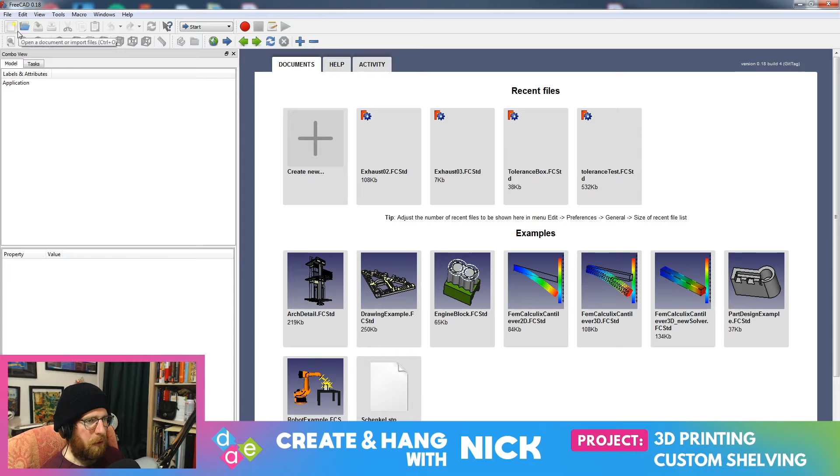Now, in this case, we're going to create a new document here, and already we've got the blue of the infinite. So we're going to go ahead and start by creating a body, and we're going to create a sketch. Now, what axis do I want to do this in? Yeah, we'll do this from top view, which is the XY. Great. All right.

Now, I figure what we're going to do first is, rather than actually model this, to get a better sense of the proportions and everything, I'm actually going to create the table first. So that way I can sort of fit things a little bit more. I think that would be a little bit easier for reference too. So let me pull this back over. So since this is a top-down view, we're just going to create the table. And all right, I have to convert this from inches to millimeters. My favorite thing.

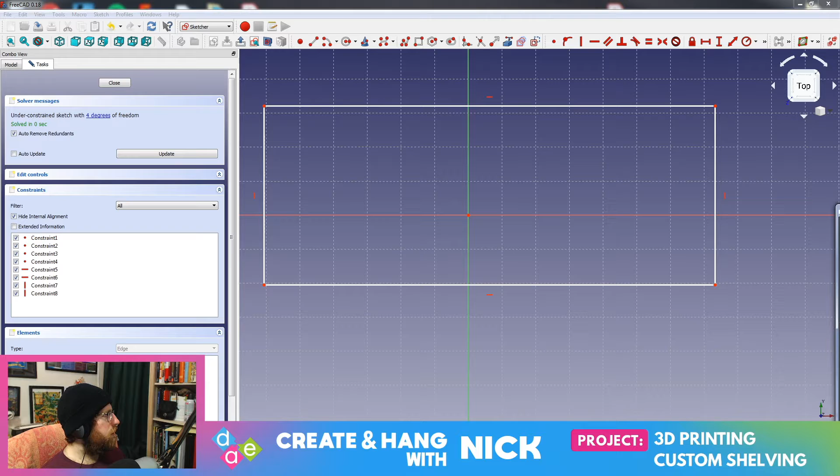All right, I got to bring this back over for a second. Sorry, I'm trying to avoid doing a lot of number crunching because I know that's not the best thing in the world to watch, but this is unavoidable in this case.

Numbers are important. I gotta say, one of the things I wish, and I realize this is tough to do, is have school projects in mathematics that were a little bit more visual and they gave you stuff to actually handle. I don't think I started to appreciate mathematics until fairly recently, actually, when I actually started needing formulas and things to figure stuff out. I don't know, it's just a thought. I realize it's very hard to do, and you got to learn some specific things first before you do other things. It's tough.

But let me see here. So I need 23, and number crunching. Actually, if I remember correctly, 0.65. Nope.

23.625 and another smidge. So another 5. All right, so that is 601.6117 millimeters. So that's the long side here. So 601.6117. All right, cool. So we got that length defined. Now we got to do this one, which we'll do that way. And we'll do that one.

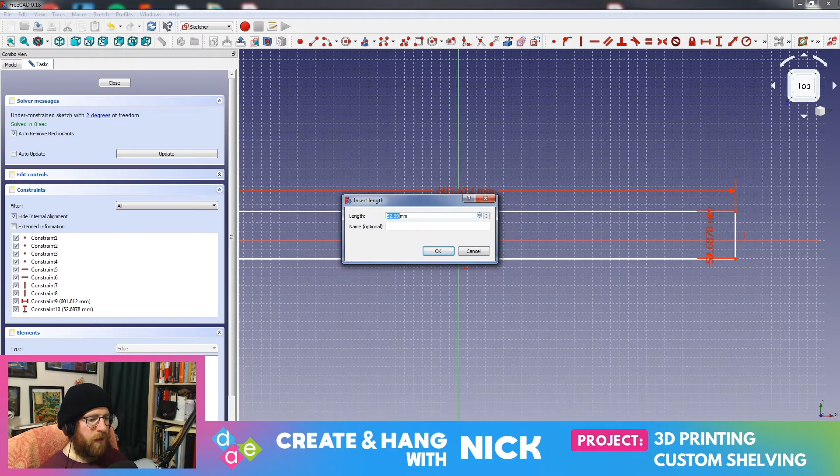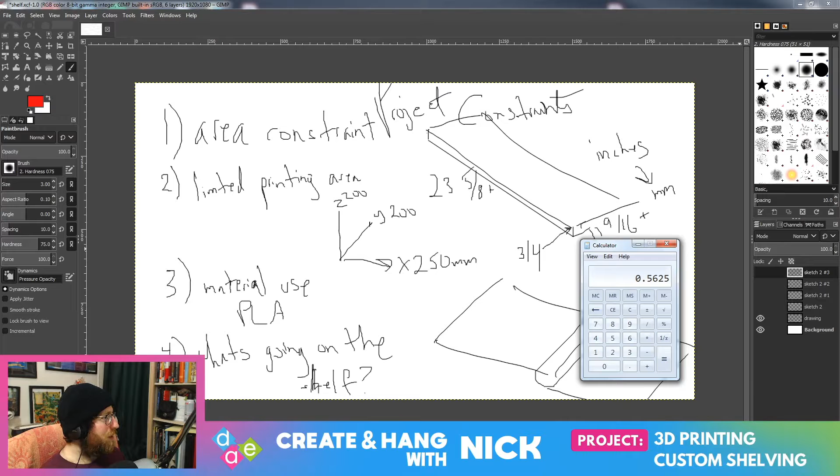But anyway, what I was saying was, while I compute this, the world's first computer was named because essentially people didn't want to crunch numbers. Because it's very boring by itself just to do that. So the whole purpose of having an early computer with like a mechanical crank and all that stuff, like no electronics involved, like the first sort of computer, not the computer that I'm using right now, obviously very different. The first computational machine was meant to not have humans crunch stuff. Because back in ye olde days, you had a person called a computer who would just crunch numbers. That was their whole job. And people are like, no, this sucks. So essentially, they just started coming up with a computer to do that for them so they wouldn't have to.

I do find it very interesting where, and again, it's been a while since I've been in school, so they might have changed that, but they obviously try to have word problems and whatnot, and things with images, but there's just something different about having stuff in your hands and more practical examples. Again, it's not realistic to put that into place everywhere, there's different situations for everyone, but I do wish we would move toward that a little bit more. So just food for thought sort of thing.

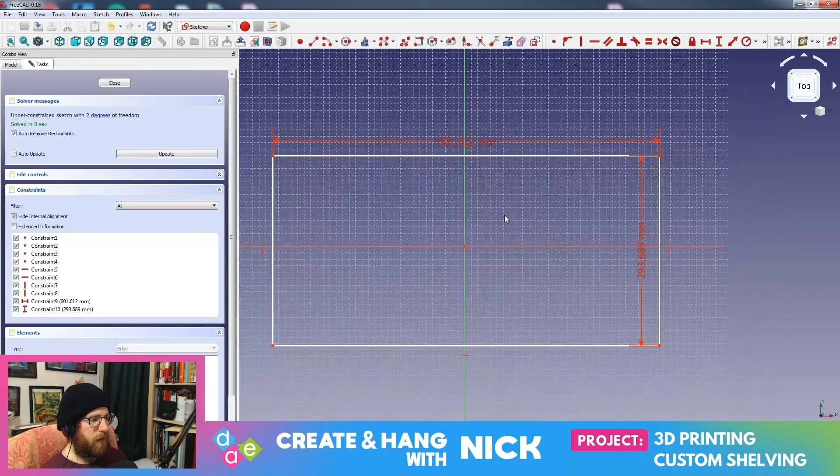And this is 293.68877. Boom. All right. Now we're going to worry about the thickness in just a second, but I want to make sure this is centered on the doohickey here. Though I'm wondering if it makes more sense to constrain it this way. I might do that for right now. Because if I'm going to build this sort of support, I may want the center point around here matching up with the corner of the table. So I'm going to do that for right now, just to constrain it. There we go.

And we're going to pad it. And what was the thickness on this bad boy? 3/4 of an inch. So 0.75 of an inch is 19.05 millimeters. That's going down. That's going up. Okay, great. All right. So this, we're going to rename this. So this is our tabletop. So excellent. We have a reference. And let's make sure we save this because I don't want to do that again.

Computing sucks. This is why we have calculators. Yes, it's important to know how to add and do all the things, but calculators are useful. You should practice to do it without it if you need to, but nothing wrong with using it. Let me see here. What am I doing? Sorry I went on a math rant for a second. But it's an interesting topic.

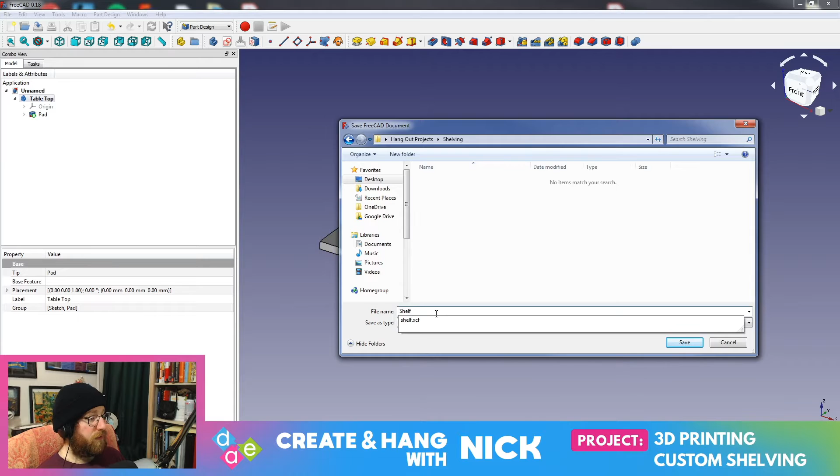What are we doing here? Brain loading. Here we are. We want shelving. I guess we'll call this shelf. All right, cool. So now we got to get back to this sketch. So I don't really have sizes defined here. I think what's going to make sense is to figure out how thick I want these pieces to be, because of the constraints that I put in earlier, which, by the way, if you're wondering why my scribbles look like I just took a pen and went crazy with it, it's because I was trying to use my tablet and I didn't install the drivers, which I still have to do, so it came out wonky anyway. But I do have a couple constraints.

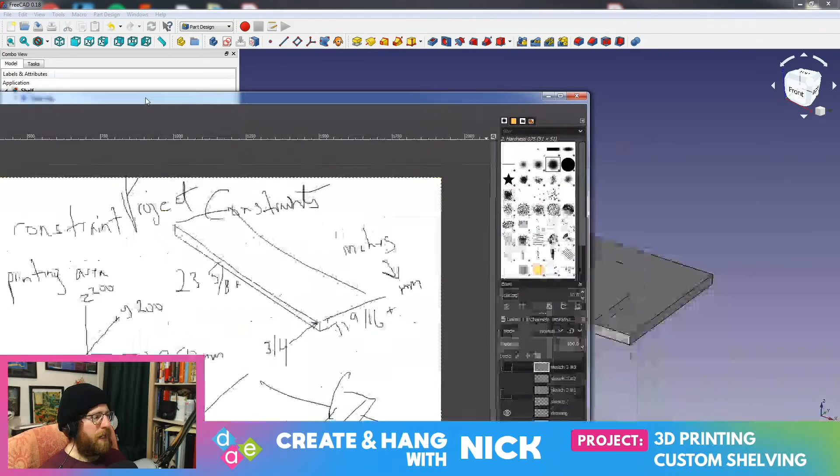One being that I want to use as little PLA as possible, which is the material I use for printing. And I want the print to be fairly fast and not take up a lot of time. We also have a limited printing area. So, with that in mind, I think... Oh, all my tabs and whatnot went away. Bring them back. All right, there we go. So, with that said, I need to figure out how thick I want the support pieces to be, because that's going to influence everything else.

Now, from my printing experience, I'm going to say that something around 15 millimeters thick for this should be just fine. 10, I think, might be a little thin, possibly. But I think 15 is a good, solid number. Because if it's 10 by 10, that might snap easily. I don't know. I could print a single corner just to see if I like it or not. I can always update it. Maybe we can get away with 10.

Because it's going to be like... what did I say? It's going to be 10... And then what's the maximum height? I said about 9 inches. Oh, that's 6. That's 6 inches. That's the max my calipers go. Where's the tape measure? So I said the max shelving for each unit would be about 9 inches. You can't really see that from your screen. Sorry.

Maybe that'd be all right, actually. You know what? We're gonna risk it. Let's go for 10. We'll print out a single corner in the printing process. But I think that's going to be stable enough because if I print it properly, printer orientation doesn't matter. Let me actually talk about that really quickly.

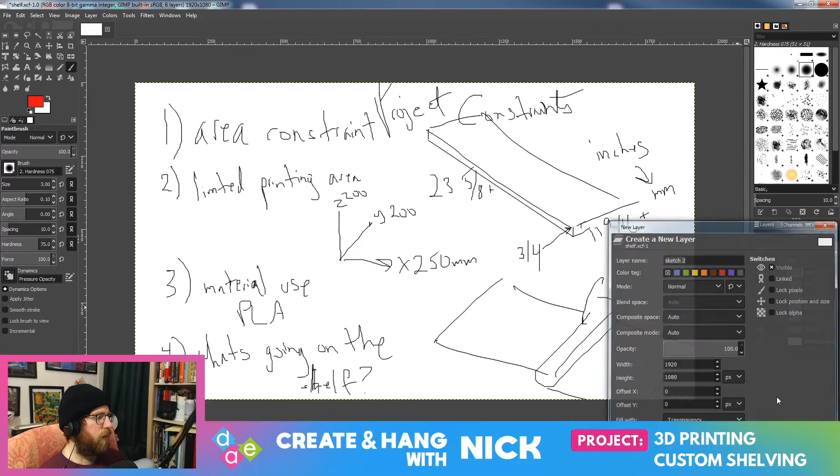So on a 3D printer, nope, that's a folder. So on a 3D printer, you've got a bed, right? And the printer will move back and forth and slowly build layers up as it goes. Depending on the orientation of the item, so if I printed my support pieces straight up like that, the layer lines would be going across this way, all the way around. That's going to have it

it's going to fuse on those layers, versus if I put it down, it's going to have a longer piece of single plastic before it starts creating the middle sections. And that's kind of nice because it's going to be a lot stronger against pulling and pushing in this direction, versus this is actually going to be a little bit weaker because that's where the stress areas are. So if I do that, along with keeping in mind the printer orientation, laying them down flat as much as possible, I think we'll be okay.

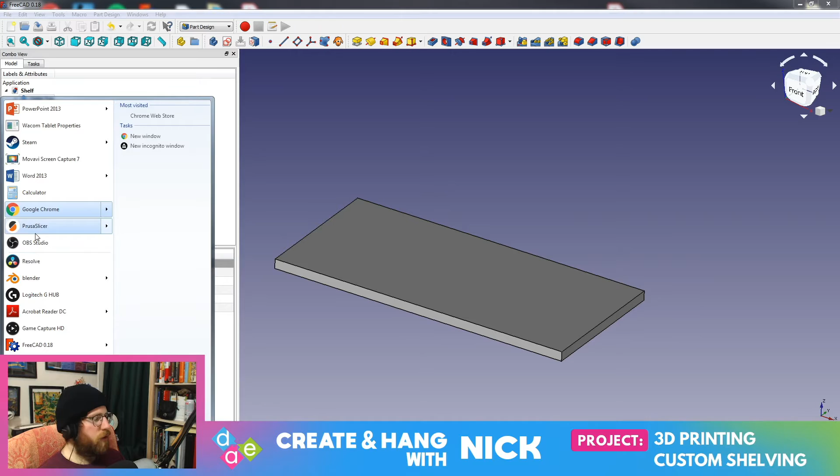So, I think we said... I can't remember. What's my maximum build area for my Prusa? I think I said it was 9 inches. Let's see here. I can't remember. Prusa. Is my cube still on here? Yes, it is. Need to clean my desktop. Alright, here we go. Yeah.

And just want to see what... So I'd say I probably want to keep it around that size. No more than that. So that is just about 230 millimeters, which how is that in inches? 230. Yeah, it's about 9 inches, so I had that about right. So we'll say 230 is the max height. So how are we going to define this?

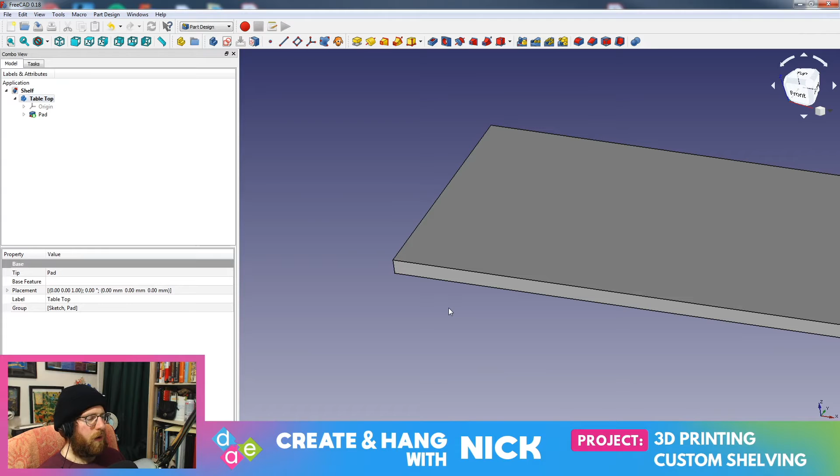I think maybe we'll put in a... I think for a start, we're just going to throw in a simple object. Can I do that? Hey, look at that. I added in a cube. Can I transform it? I certainly can. I just need to put in a cube here for reference. And then I want to change its scale. How do we do that? Data, length. Oh, it's already 10 millimeters. Look at that. All right.

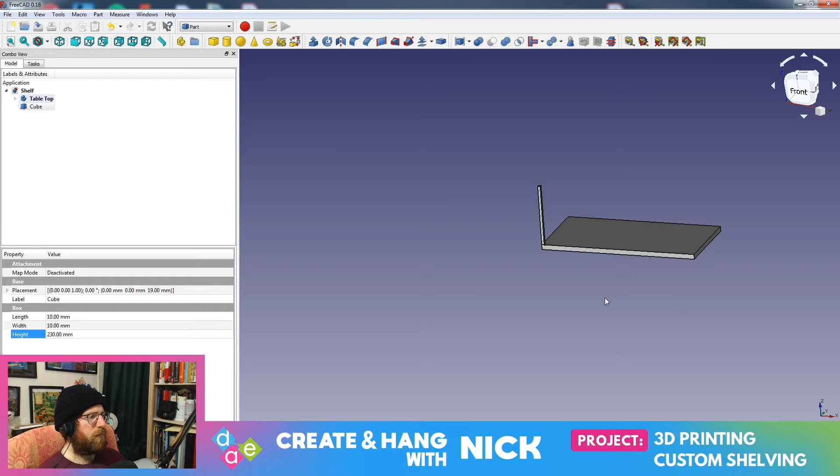So the height's going to be 230 millimeters. Okay. Cool. In fact, I could probably just use this instead of creating a sketch or anything. Actually, I can draw on this for reference. We'll do that in a little bit. All right, so that's one of our corner posts there. That seems pretty good. So now I need to go ahead and create a piece that's going to fit around this table. So how would I like to draw that? I think I'm going to...

This is a little tricky because in the other sketch, I said I might... Oh, I rotated it, sorry. Oh, no. All right, there we go. Originally, I was thinking of... Which layer was that on? Nope. So I also had the idea of having these pieces that would just slide on the ends. However, I'm wondering if a corner section might be better, but that might increase the size of the table. And I don't know if I want to do that. Plus, it might be a little bit harder to model.

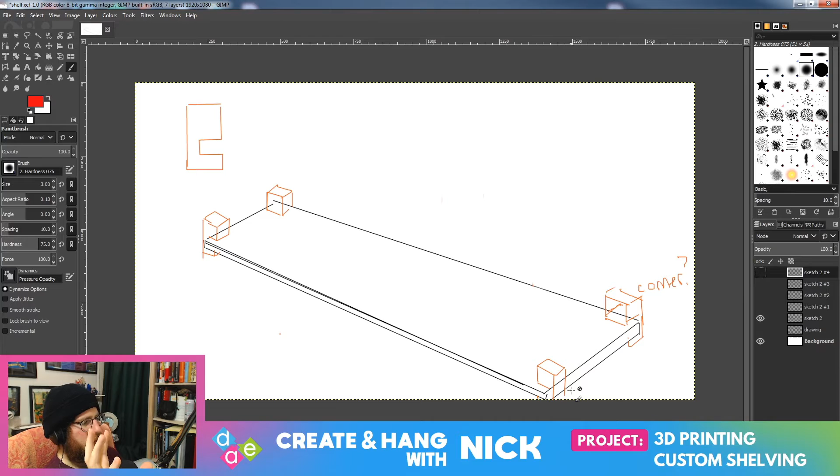I think I want this to be as unobtrusive as possible. I don't want to have anything along this gap here because this is the part where the table actually folds up. So there is a little gap, but I don't want to risk there being any resistance there. I want that to be very easy. So since I can't do corner pieces anyway, because it wouldn't make sense to do it here or here, I think I am going to go with this design.

Because otherwise, I would have to model a Boolean and then probably just carve that out for simplicity. So, we are going to stick with this model, not this one. Why didn't that let me draw? I don't know why it switched to white. Excuse me. Sorry. There we go. So, no. We're going to say no to that one. So, in that case, we are going to go ahead, create a new body here. That's just my reference, so let's rename this. What am I calling this?

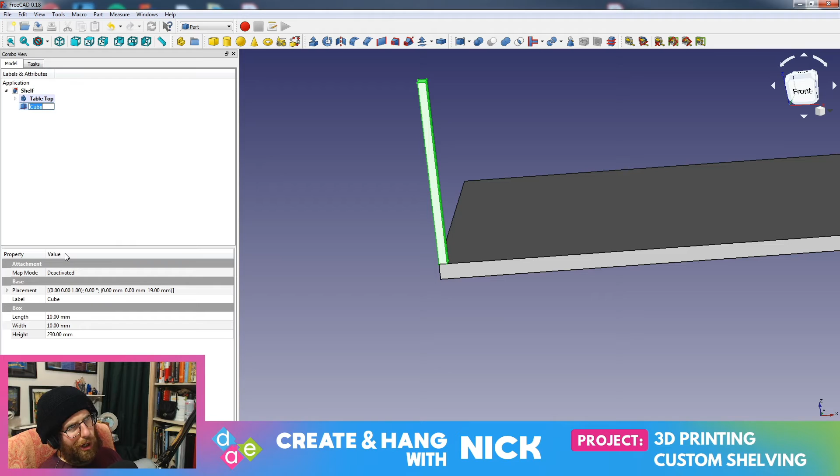Why is this so hard? Support. Or shelf. Corner support? Question mark. Alright, fine. So we got that there. Now, I think we're going to go ahead and create a new body. We are going to do that.

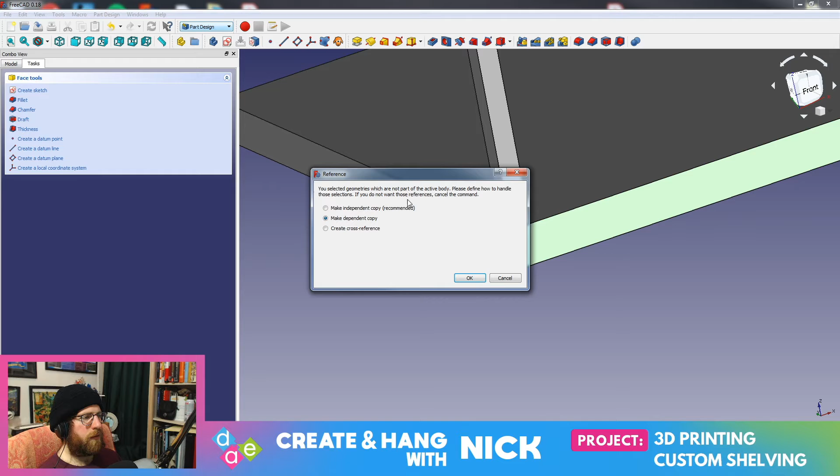And let's select this. Create a... Nope, that. Create a sketch. And I want to make this a dependent. You want those references? Cancel the command. No, I want it to be dependent. Thank you. So what I'm going to do here is create a sketch, and then we're going to extrude it.

So, so nice when you define everything correctly in those axes. I did it the wrong way the first time, which is okay. All right, we're going to take this little tool. We're going to heat.

Herk. Sorry. After a long day, you kind of make your own fun, if you know what I mean.

So we're going to do a couple... Nope, not that one. This is going to be straight. That's going to be straight. That's also going to be straight. And all of these boyos... nope, not that one. This one. And that one's going to be straight. Alright, so basically this just kind of constrains it a little bit.

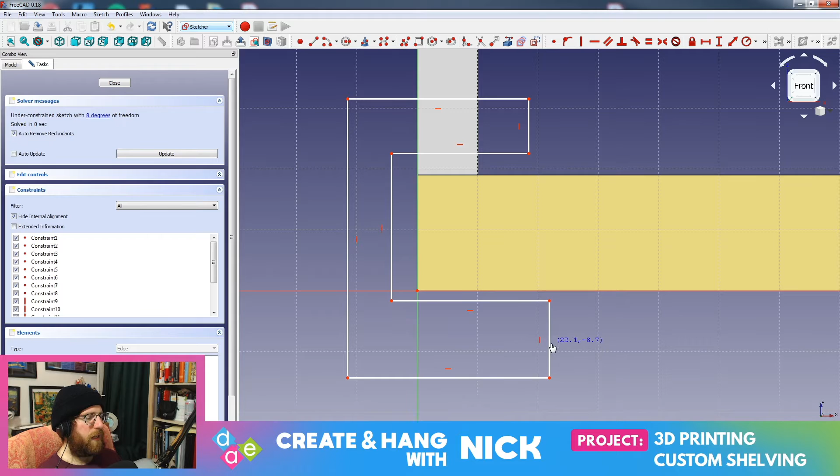Now again, I have to figure out how thick I need this to be. But before I do that, I'm actually going to plug in some tolerances here. So I just need to define... you know what? I'm going to close this real quick. We're going to hide this. Nope. Hide this. I got this. There we go. That's what I wanted. Actually, I might as well define the rest of this.

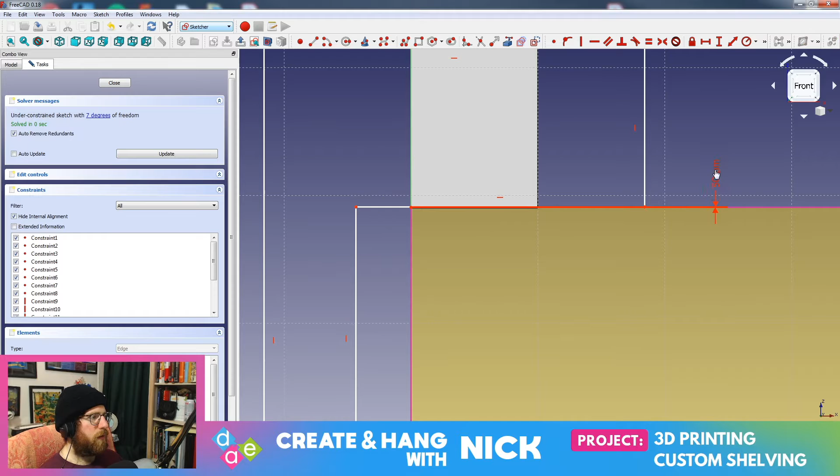Okay. So I know that I need this point and this point to be a certain distance away, specifically 0.05 millimeters. So what I'm doing is leaving a little bit of space in the event that the material expands or shrinks a little bit. Turns out because I'm printing with such a large nozzle, it's been pretty forgiving with that. So the tolerances are actually pretty tight.

So let's do boop and boop. Oh, no, I want this. That one. I want that one. 0.05. There we go. Cool. All right, so that's just going to make sure that stays a certain distance away. If I need to, I can update it. And what's nice about this is if I change the size of the table, these constraints will stay and everything else will be good to go.

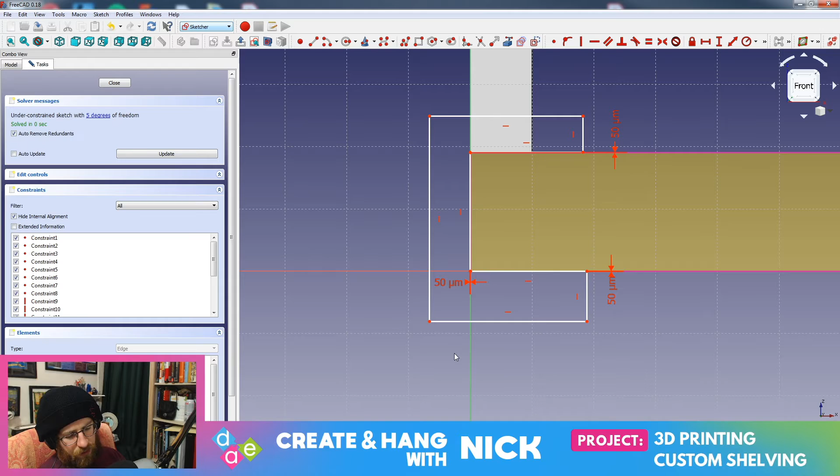So now I just need to figure out how big I actually want this to be. Again, I'm thinking we're going to keep it around 10 millimeters or so. That seems like a decent thickness. Yeah, I don't want this to be too thin, otherwise it's gonna break. So let's make this. That does seem rather thick, though. Let's try 8. That seems a little bit better. And we'll just keep that consistent all the way around.

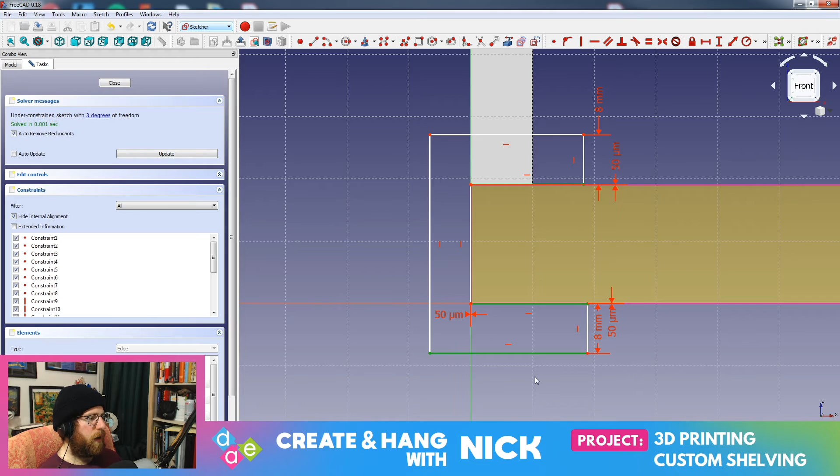Nope, not what I wanted. We will also make this 8 millimeters. And then, all right, I got that defined. I got that defined. 3 degrees of freedom. Where are we? This point? Oh, I see. So we need to define how big this one is. So this point needs to be, say, 8 millimeters away. Perfect. 2 degrees of freedom. That one, and probably this. Yeah, okay.

What's the distance from... This looks like an additional 10 millimeters here. Or maybe... Hold on. What is this distance over here? Because I want this to be in the corner as much as possible. So... Stop it. Menu. I need you to work. Oh, that's another piece of geometry, though. Can I add that? No, it won't allow me.

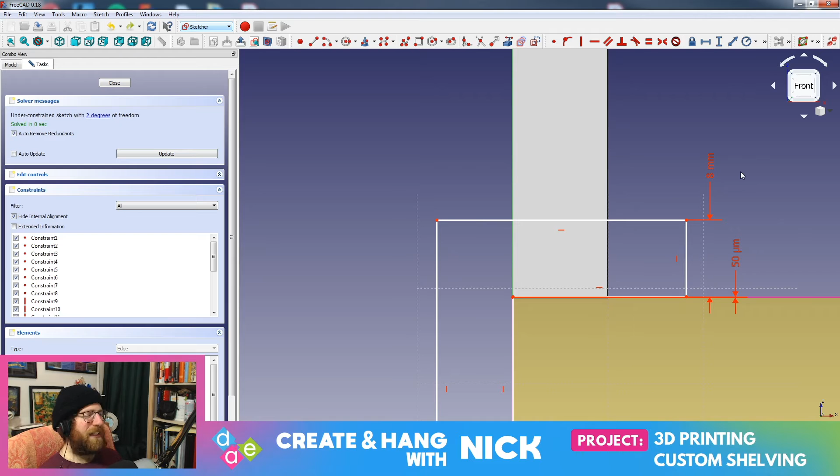Oh, why, thank you. I don't know if you heard the music, but it says, "You're doing great!" And I was like, all right. I'm doing good.

Let's see here. All right, what am I doing here? I don't think we need to go too crazy measuring that. So let's come back to that. Is it 26? Let's make it 25. Keep it simple. All right, I need to find this guy here. Actually, can I just make this equal? Boom. So that way, anytime I change this measurement, that's going to go on over here. See, now I'm thinking. All right, so we have that roughly defined. So I can close this. Turn that off. Turn this on.

And now we're going to go ahead and pad it. Nope, other way.

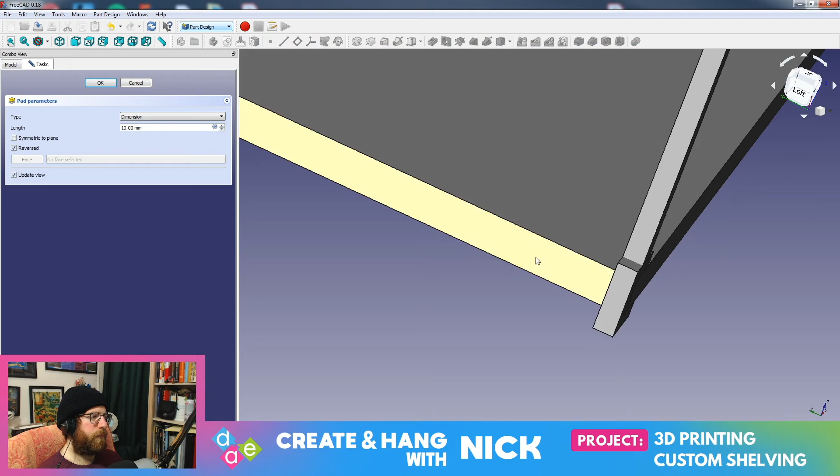I got an itchy shoulder. Hold on. Okay. All right, we're good.

All right, so let's maybe double it. So if it's 20 millimeters, I have this being 10. We could put 5 millimeters on either side. How thick is 5 millimeters for reference? That's not bad. I'd be okay with that. Okay, cool.

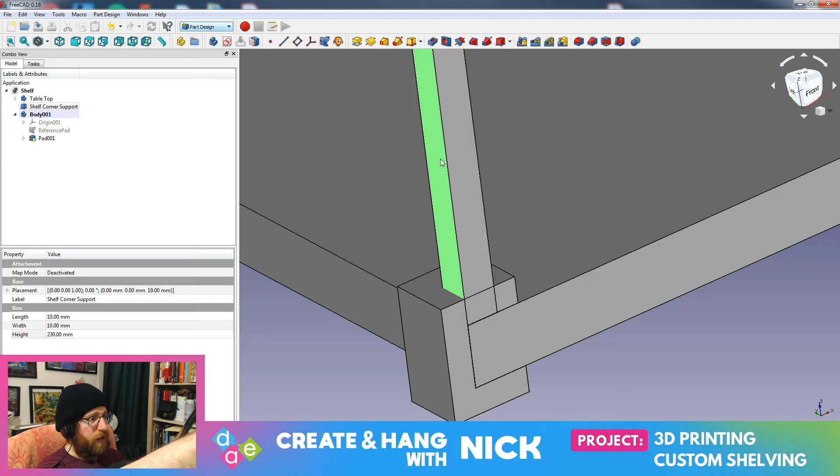So I just got to make sure that this is in the correct reference spot here. The other thing I have to think about is I could probably just make a hole here so that this is actually flush on the table. It just fits through this piece here. So how does one go about doing so?

I say, good sir, how does one might accomplish such a feat? I don't know why we went back to 19... No, not 60. Not 70. 1920s, I want to say. I think that's a 1920s voice. Let's see here. Had to think about that for a minute.

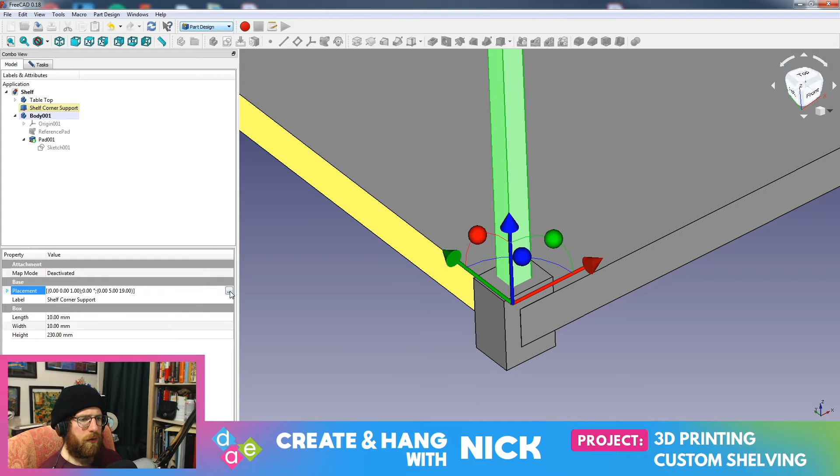So let me see if I can move this guy. Let's do a transform. In fact, what are the... Where's it? Nope. Stop it. No. Stop it. Alright, where are you located right now? Translation. Let's go to top view. Oh, did I just move it correctly? Oh, I probably can't even see it because it's all one piece. Huh. Hold on, I have to math.

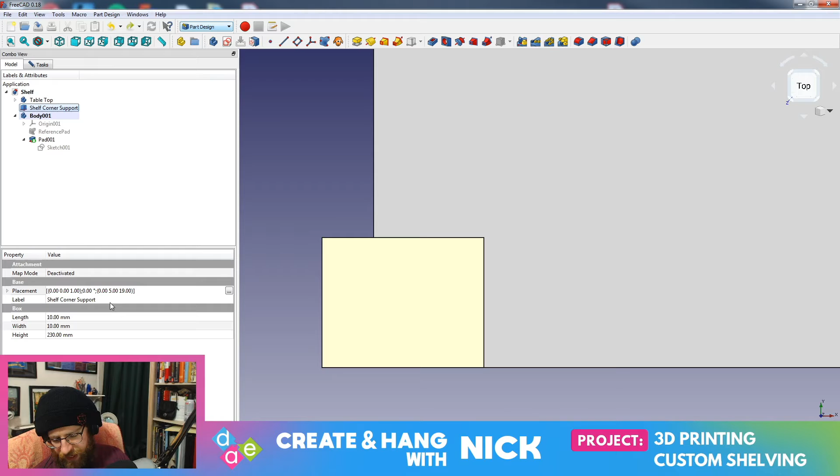Alright, so I have a thing that's 20 millimeters long. I have a thing that is flush, that is 10 millimeters, so roughly half. How many units do I need to move it over to get it in the center? 1, 2, 3, 4, 5, 6, 7, 8, 9, 10. So that would stand to reason if it's 10 units long, the midway point would be 5 in. So to get it center, I would need to move it 5 units down. It looks like I did.

Alright, apparently I eyeballed it perfectly. Mic drop. Or marker drop. Alright, cool. Oh, lost my space there. Okay, awesome.

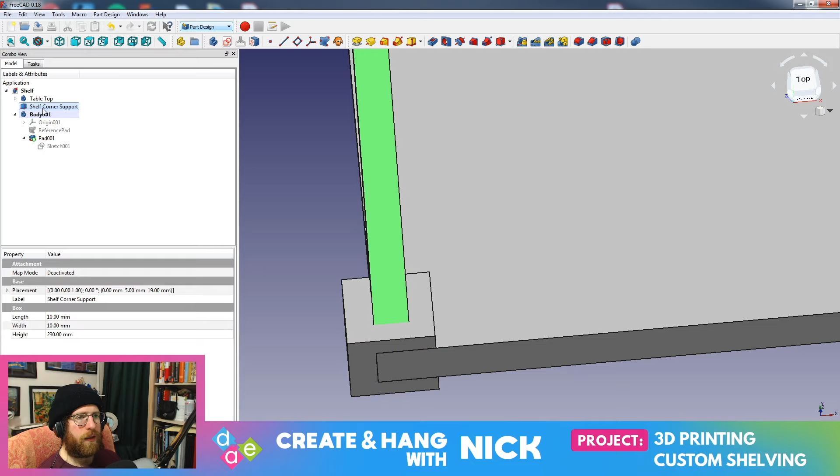So let's come over here. So I think for right now, I also have to plan for tolerance. So let's hide. Nope, not that one. We're gonna hide this guy for a second. We're gonna draw a sketch on top of here. Ooh, that's no longer center. That's okay. We'll work with it.

Alright, so we know that we want this to be... So not 10 millimeters. We want it to be... We'll plan for tolerance the other, so we'll say 10.05 millimeters. And this is going... Stop it. These guys are going to be equal. This is also... Wrong direction, though. This is also going to be 10.05 millimeters. And that should pretty much constrain it that way.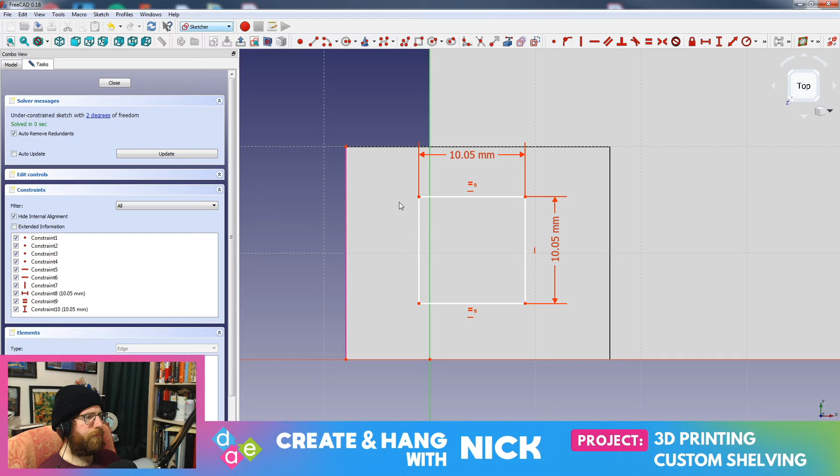We just got to get it in the center. So if my math is correct, it should be 5 units from the edge in either direction. So let's just add this in as a reference point. Listen, computer. Alright, that doesn't seem right. No, we got a whole distance over here. This is... Oh, again, this is a little bit bigger, but it shouldn't be that far off. Is my math wrong? No. What am I doing wrong here? Hold on. We gotta draw this out, do this together.

I gotta put my brain to the metal here. If there's much of a brain left, I swear, I'm eating a brownie after this. I worked hard today, and I deserve a gosh darn brownie.

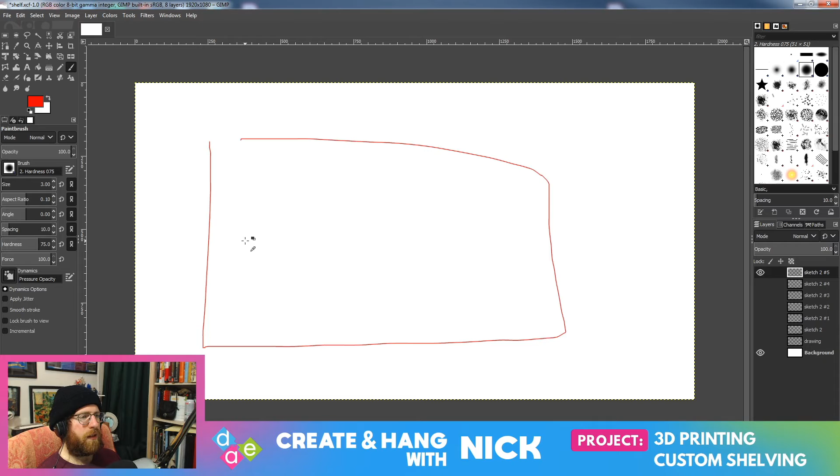Alright, so let's see here. So we have a thing. It is 20 units across. So that's at 10. This is 20. And we'll say that for reference, this is 0. So we want this in the middle. This is 10 units across, right? So it's 5 in this direction. This should be 5. This should be 15. So it should be 5, 15, and then 20. So it should be 5 millimeters from the edge.

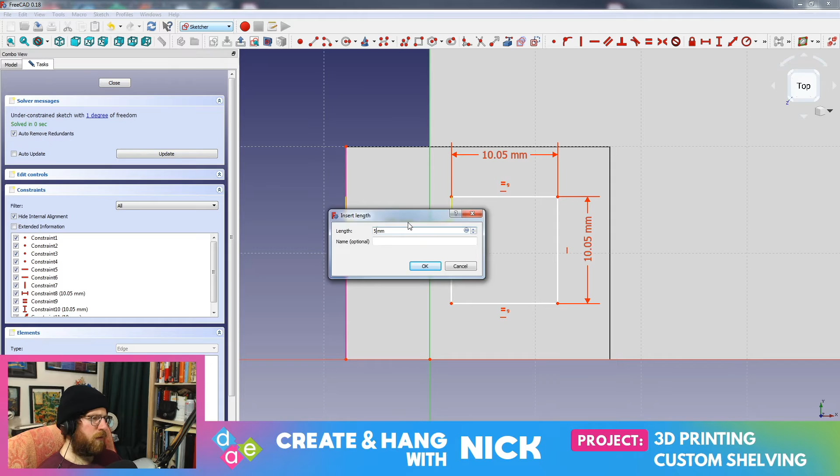What am I missing here? Is it just from the other direction? That doesn't seem right. Unless this is not... Oh, wait a second. This is 8 on the bottom. That's right. And then how far was it padded out? I'm thinking that's a square. This is not a square. That's my fault. Tabletop. What's the sketch here? Nope. Not what I wanted.

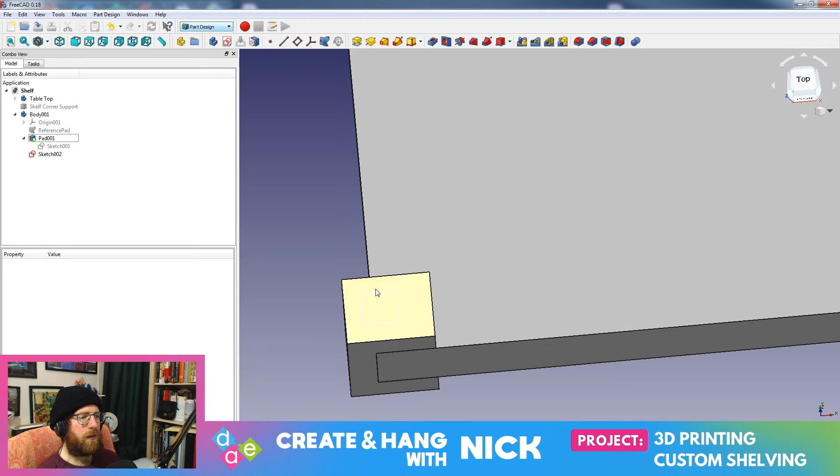What am I... Let me look at the original. No, I want the original sketch. Thank you. So, oh, this is 25 millimeters across. All right, so that's one problem. And then if I remember correctly, how far did we pad it out? 20. So the top here is actually 20 by 25. Aha. All right, different numbers.

Where's my eraser? Different numbers, boys and girls. We had it wrong. So it was 25 in this direction and 20 over here. All right, so if it's 20 all the way across, we want the distance. So this would be 10 would be halfway up. This is 10 units long, so if this is the center point, that's 5 down.

So it'd be another... Wait. It's 10 units and then 5 and 5, so that should be 20. So it should still be 5 units from this way? Hold the phone, folks. That might be right for this direction. Just about. Okay, that looks correct. So it's just this direction that I mucked up on. All right, so this way it's 25. Oh, midpoint's going to be weird.

25 divided by 2. It's 12.5. So it's going to be 12.5 in the center. And then 5. Oh, math. 5 that way is 17.5. I'll just do it from the other side. And then so then 25 minus 17.5. So this distance here should be 7.5, if me maths are correct. Same for the back area if my math is accurate, which wouldn't put it past me for it not to be.

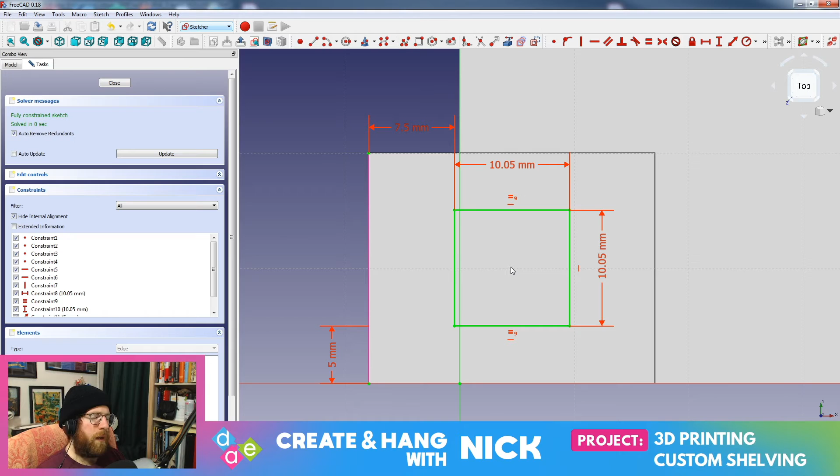Yeah, that looks correct. Hey, we did a thing. I'm no rocket scientist. I will take my victories where I can. All right, cool. So we got that. And we're going to turn this into a pocket. Oh, I don't have it. It's not the active body. We'll make it the active body. There we go. We just want this to go through all. There we go. So now we have a corner support.

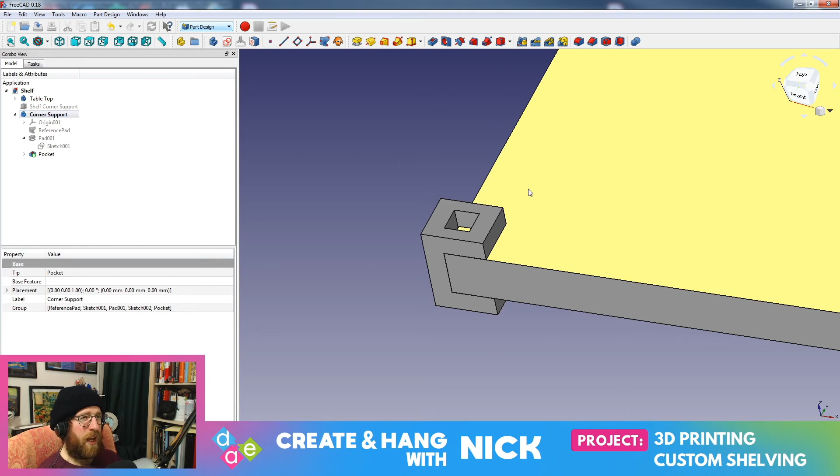Boom shakalaka. I don't remember what that's from. I feel like that might have been from... Oh, what was that movie with Shaq and he was a genie in a boombox? Yeah, that was a weird film. I seem to remember liking it, and there was something to do with a milkshake in there. I don't remember. It was a long time. I think it was a Disney film.

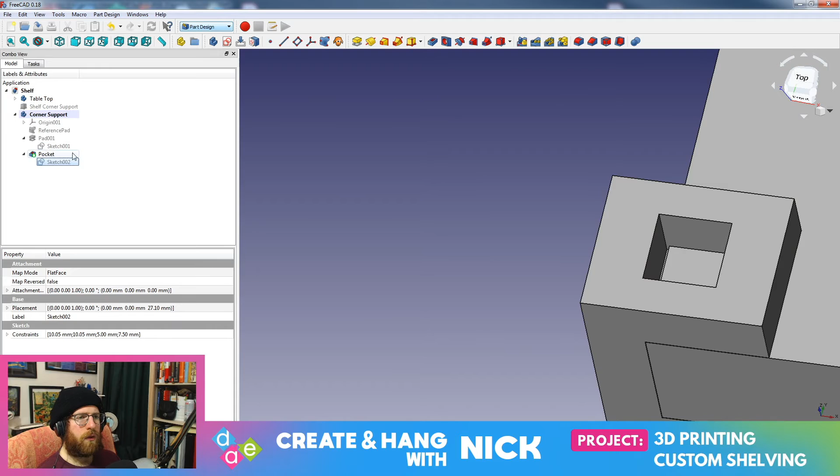Oh, actually, I'm going to take that back. I don't want this to go through all. I think I've said it before, and I'll say it again. Did that work? Up to face? No. Dimension. Ah, music. Oh, alright, we're fine. What, this is 8? Actually, how thick is the thing? 'Tis 8 millimeters, sir. So we're gonna come back over here. No. I want the pocket. 8 millimeters.

Oh, interesting. That's gonna leave like a little bit of lip on the inside here. Is that gonna do anything? Nah, I think I'd rather have it at 9 just to make sure there isn't like a really thin face over here for 3D printing purposes. So long as that fits snug over here, should be fine. Is that the corner of the table? Maybe I should just move that over to offset it. Yeah, let's actually do that.

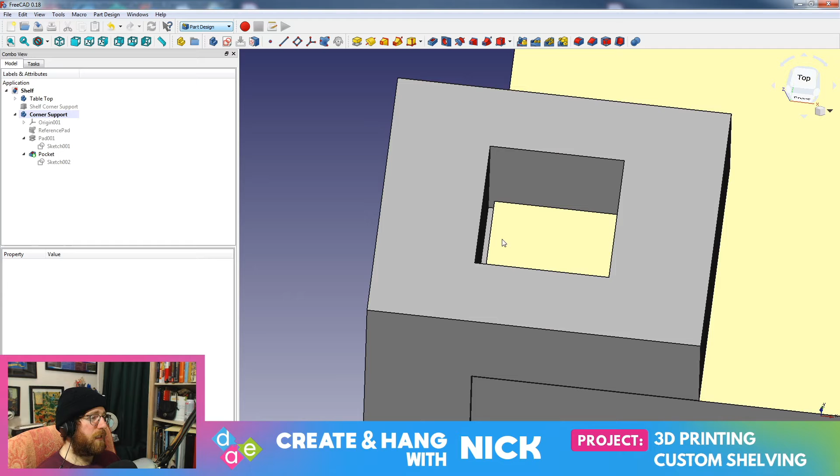So let's come back over to the pocket here. No, that's the right one. We're going to offset this by... We're going to move it forward just a smidgen, just to see if that gets rid of that. Yeah, okay, there we go. Probably overdid it by a little bit, but that's okay.

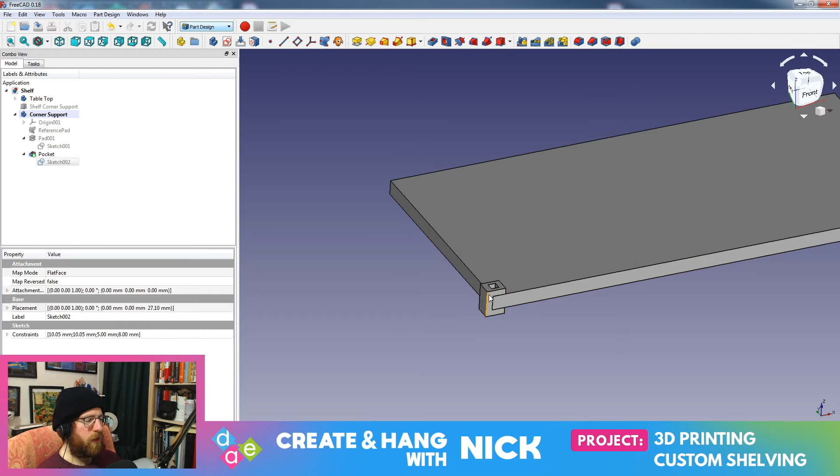Alright, so we have our first part. That's one corner. And what's nice is, because we designed it this way, we can just duplicate that, move it on the end, and just rotate it to fit what we need. Or we could do it on the ends. Works all the way around. Cool. Yay! We did a thing.

I need one of those noise makers. Wait, I'm on the internet. We can find one. Noise maker. No, not how to make a noise maker. I need the actual sound. This is important. Party horn noise maker sound effects. Let's go for it. I don't know what it was saying in the background, but you know what? All the way.

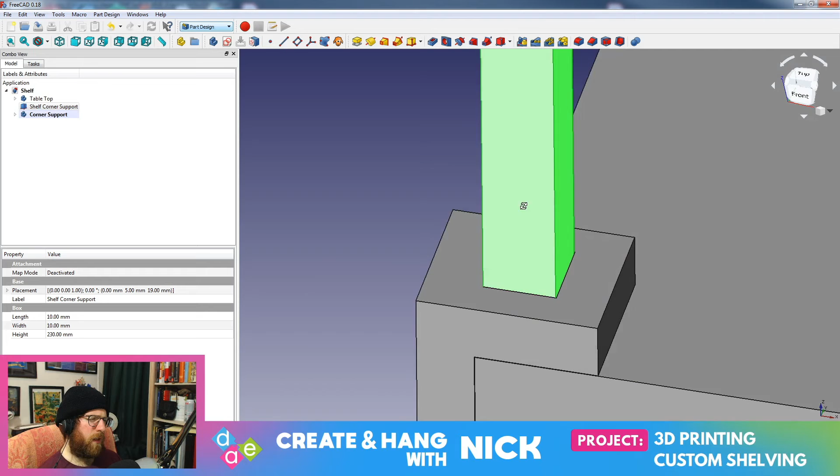Alright, let's see here. Getting back to the business at hand. Alright, so we've got that. Now we need to do a thing. So we've got that. Right? It's a little offset. That's okay. Or somehow it's fitting just right. Question mark? Very weird. I think I'm just going to turn that off. I'm going to grab this sketch. And, oh, music go bye-bye. There we go.

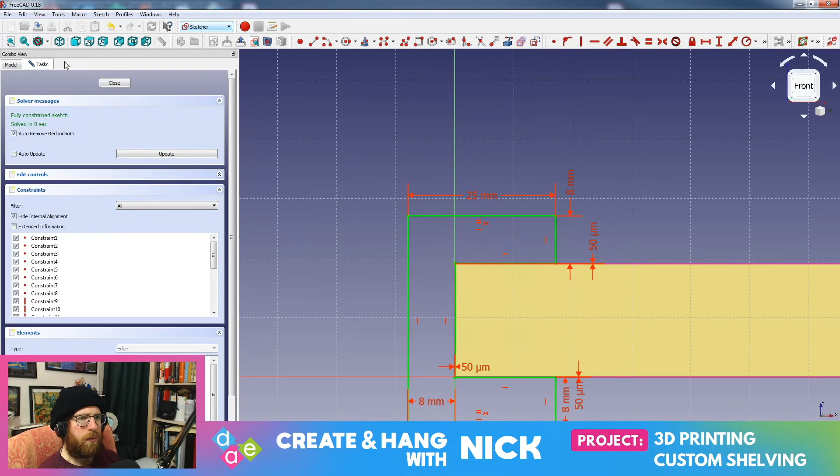And what have I got here? Blah, blah, blah. So we're gonna... Which sketch am I looking for? Nope, not that one. That's the one I want. We're gonna go ahead and create another body. Where? It's under part design. There we go. Create body. And we're gonna create a sketch on top of here. Bloop.

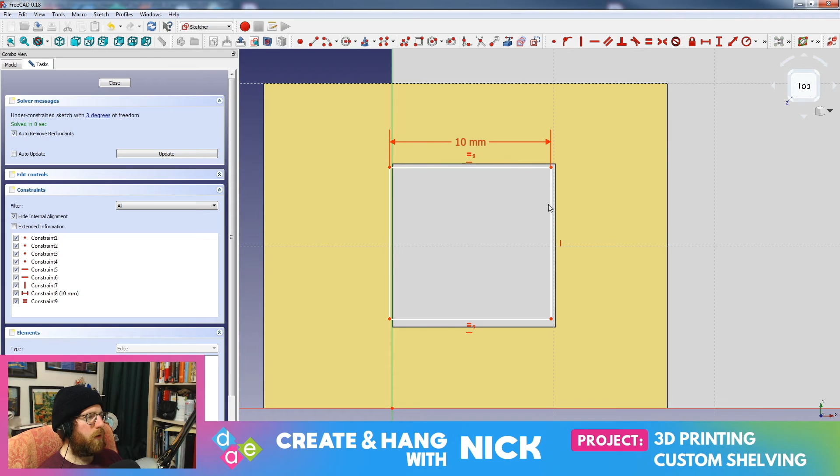And we're going to create another thing. And this one, we're going to make 10 millimeters. This and this are going to be equal. This is also going to be 10 millimeters. And that by default will lock this in because they are all parallel.

Oh. Sorry. That snuck up on me.

Okay. Let me just see something. This should not be matching up. Should be a little bit smaller. Yeah, because there's going to be a little bit of a tolerance difference here and there. So I'm actually just going to make sure that... Let me come out of here for a second.

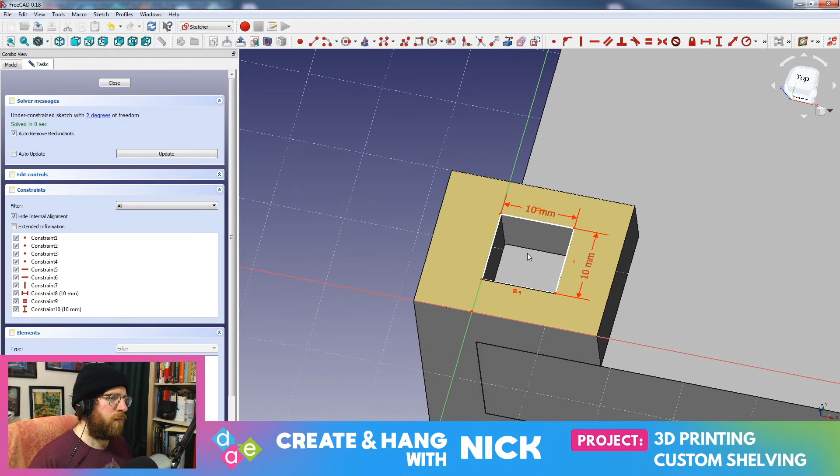Oh, I'm wondering if I should have... No, we can pad it in two directions, I think. Let me double check. Pad... Oh, yeah, we can do 2 dimensions. Great. We'll do that in a second. I'm going to turn off the rest of this stuff for the moment. And we're going to go back to the sketch. Move that over here. Just gonna get some references real fast.

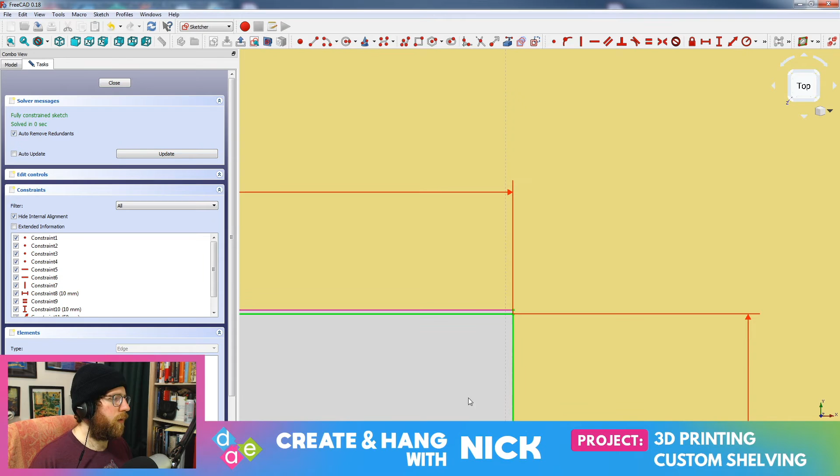And I need you to come back over here. And we need you to be 0.05 millimeters away from that spot. And from here to here, 0.05 millimeters. That should constrain it. So why is this lining up perfectly over here? That should not be the case.

Huh. Interesting. Hide that for a second. Nope, not that one. I want the bottom one. So I already made this 10.05 to make the hole a little bit bigger than the actual parts. So the tolerances should already be in there. So what's going on?

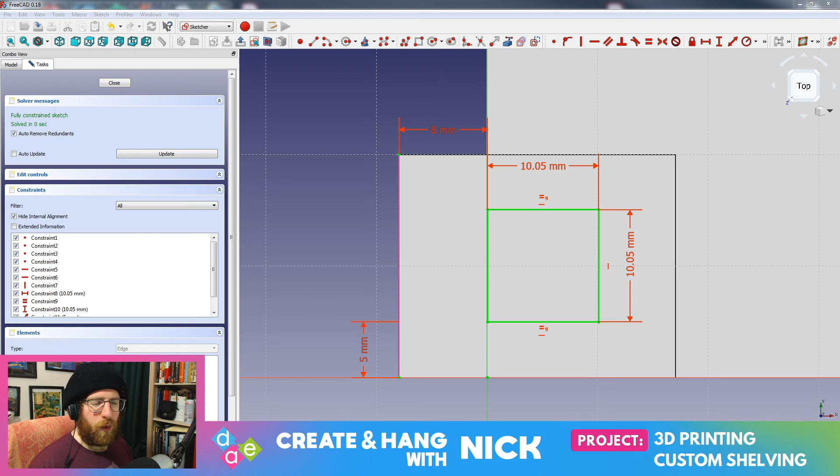Skip over the song that I really don't like. It's like the one song in that whole thing that I just do not enjoy.

Let me see here. So what's going on with our tolerances over here? Because this should be a little bit larger in all directions. Did I type in something wrong? I would not put it past myself. Oh, where did my sketch go? Oh, you need to turn this on. That would help. Don't know why that resets.

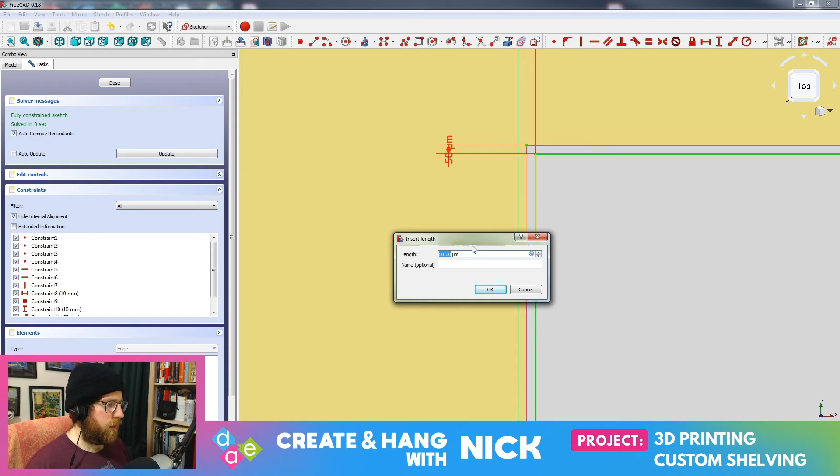Unless this is 0.05 millimeters. Yeah, that's correct. 50 µm. Am I doing this the wrong way? Let me try something real quick. Because this is constrained, I can move this wherever I need to. Hold on. I want to see something. Let me move this out of the way. What? How thick is this? 10.05. Okay.

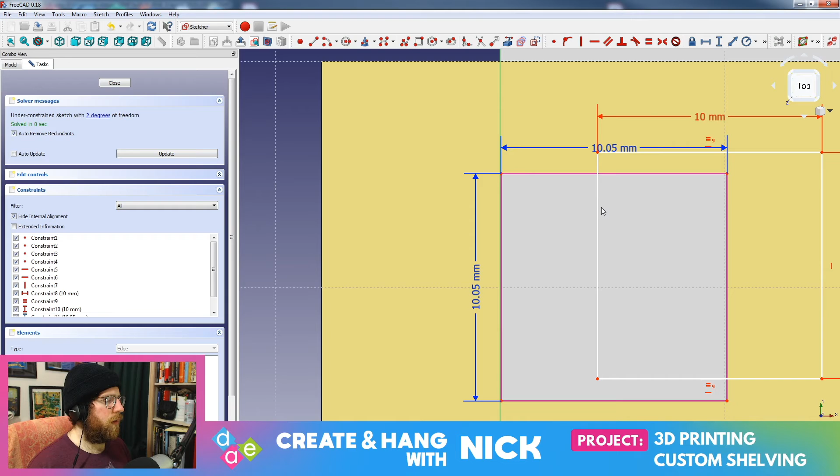Hello. Okay, that's correct. This is 10 millimeters. And this is 10 millimeters. So, what gives? I should be able to fit that in there. Have I been doing this wrong? Again, I would not be surprised. Let me just see something. I think that gives me the same result, though.

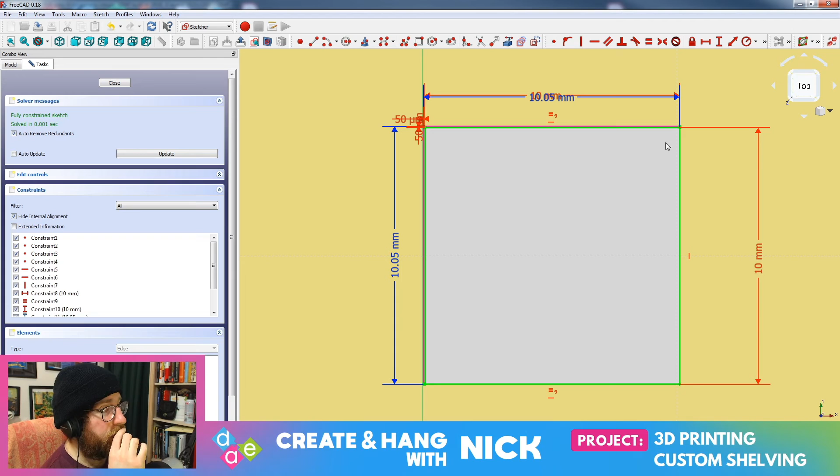See, this doesn't make sense, right? So if I have an area of 10.05 around here, and I make something a little bit smaller, oh, you know what? I think I was doing this the wrong way. So let me change my sketch over here. Oh, nope, that is not the eraser tool. Whoop, whoop. So if I have an object, right? And I've got a hole. I'm just gonna draw this with straights because it's gonna be a lot easier.

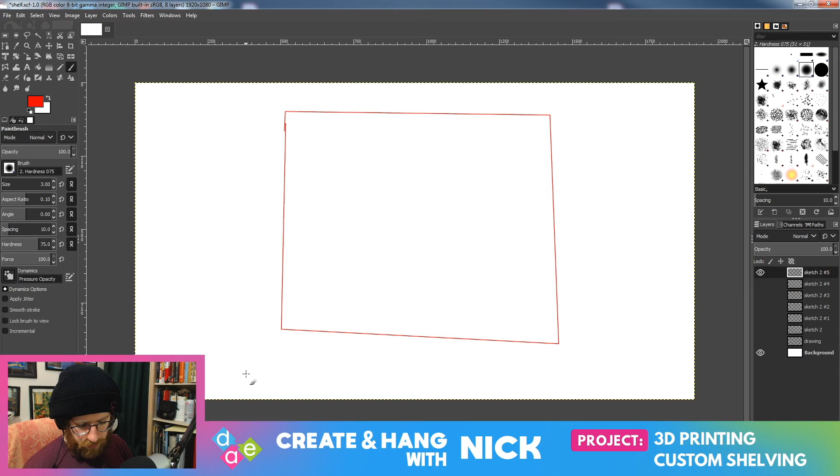Well, hold on. Let me see something. So I've got my tolerance test over here, which I printed off screen. Where's my 0.05? That's 0.15. 0.05. So we look at this. This is a tolerance test I did with the exact same example, and 0.05 is super tight. Let me just actually open up the file where I did my tolerance test, because something is not adding up.

I thought maybe because I was constraining it by 0.05 in both sections, it was actually lowering it to a tolerance of 0.1 on all sides. Because basically what I'm telling it to do here is if I'm taking out the 0.05 on one section, then it's going to match up on the 10. So my tolerance test might have actually been set up incorrectly, which is annoying.

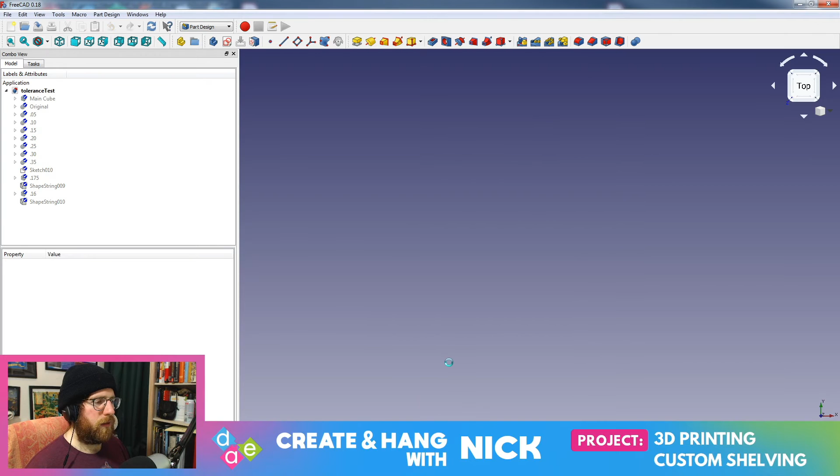No, you're not gonna let me do that? Why, is it permanent because of the Boolean? Well, I'll turn that off for a minute. What, you can't go back and adjust it? What nonsense is this?

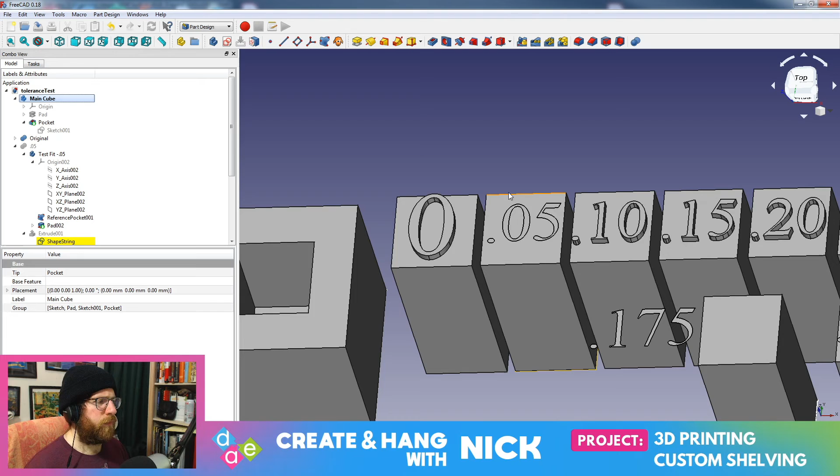Meh. I don't like it. Turn this off. Really? Why can't I get to that anymore? Start part? What are you, crazy? I just delete the Boolean? Is that gonna allow me to do things?

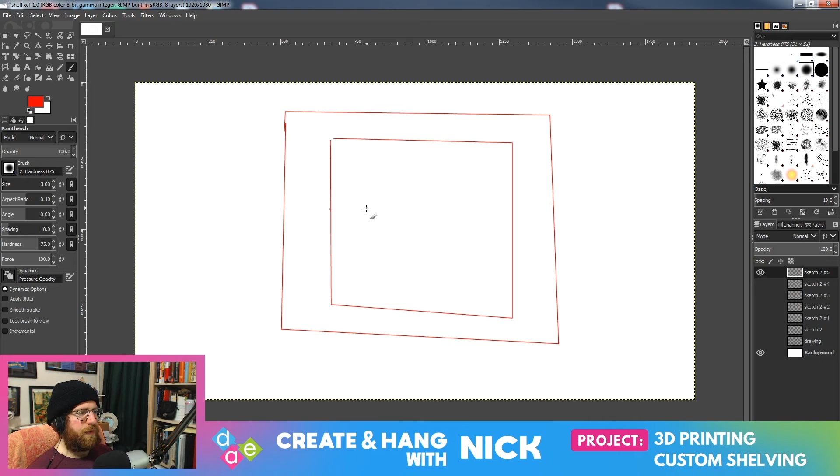I was hoping to come back into this file and see my original measurements, but alright, so this tolerance test I made may not be totally accurate because my original thought process was when I was making the hole here, I basically had a 1-to-1 part and then I would slowly scale it back. The problem is, now that I'm thinking about it, let's just say for simple math, if I expand the hole out by 1 millimeter over here and 1 millimeter over here, then I'm not really expanding it out by 1 millimeter. I'm actually expanding it out by 2 all the way across the board. The tolerance is 2 because that's the amount that I've expanded it out by.

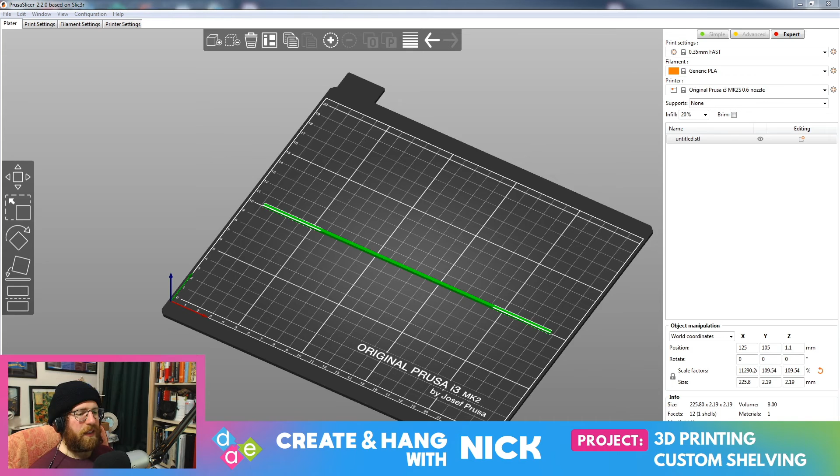So in our case, it's not that my tolerance is wrong per se, but the math is slightly off. Nope. I guess it depends on how you want to count tolerance. In my case, the way that I modeled it, it's 0.5 away from all edges. So a 1 millimeter general, like scaling, I guess would be the term for it. So I have to keep that in mind when I do my stuff. That when I did all these tolerance tests, it was on each side, not just the one.

So let me come back over here. This is why this is off. So instead of, no, I don't want that one. It was that one I was working on. Corner. Nope. There we go. Back to the sketch. So in order for this to be equal, I need to cut this number in half. Just so it's centered. And that should match up now. Yes. Okay.

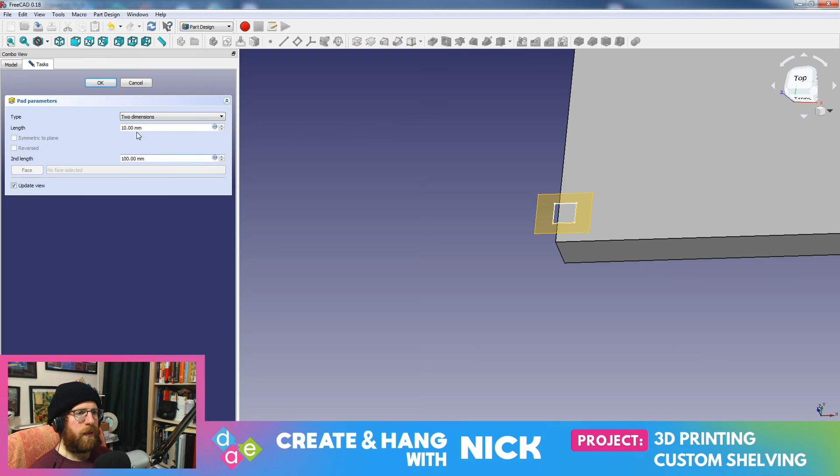Cool, cool, cool. So now we're going to go ahead and pad this. Make a dependent copy. We want this in 2 dimensions. I believe we want this to be 8 millimeters down. And I wanted it to be... how many millimeters? 230. So 230 minus 8 should be 222. Yes. Excuse me. Unsupported shape type. 'Tis a square. Corner support. Heh.

Oh, did I have the wrong thing selected? Oh, sorry. Nope. No, that's the right one. Dependent copy. What do you mean sub-shape type? What do you mean? Because I have a reference point. Is that reference sketch? What is this? I don't remember making this. Hold the phone. We got to investigate for a minute. All right, that's off.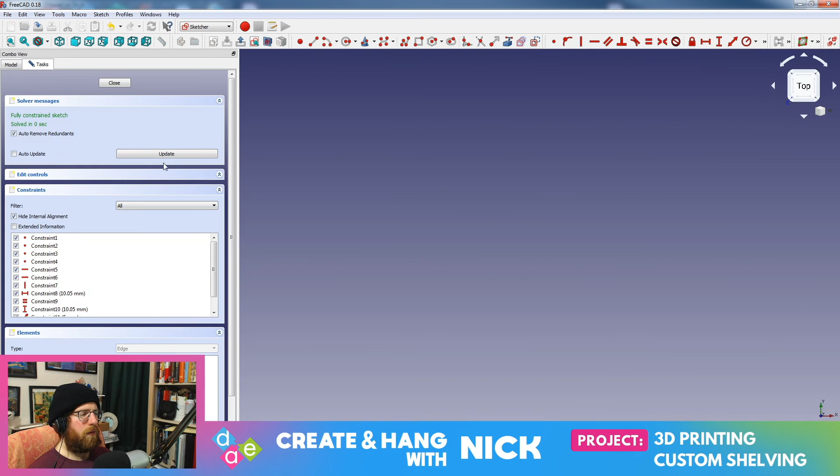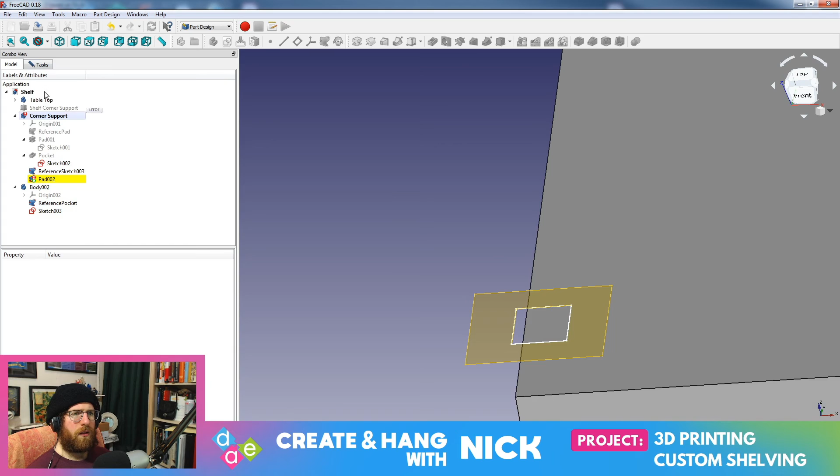Oh, okay, whoa. All right, so that's just on that. What is this? Can I just delete this? Where did these come from? I don't need those. I only need the one reference pad for this piece, because I drew it over here. Why did those pop up? Alright, hold on. Dependent copy. Those are being generated from that for some reason. So let's get rid of this. Did I draw the sketch on the wrong thing? Is that what happened? That should just be a reference pocket.

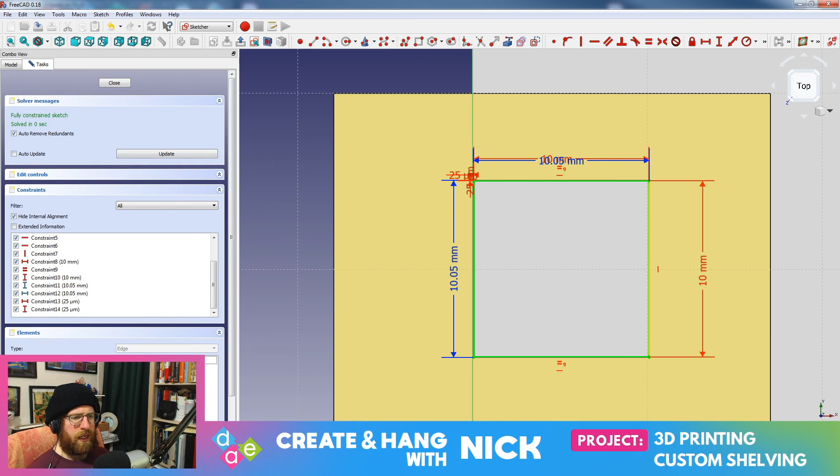Curious. The mysteries of CAD ever continue onward. That should be fine. We got no issues with the constraints. Those are just construction lines. Huh. Oh, that's not the current body? Is that what it is? Please tell me that's what it is. Huzzah! Okay. Like I said, take your victories where you can get them.

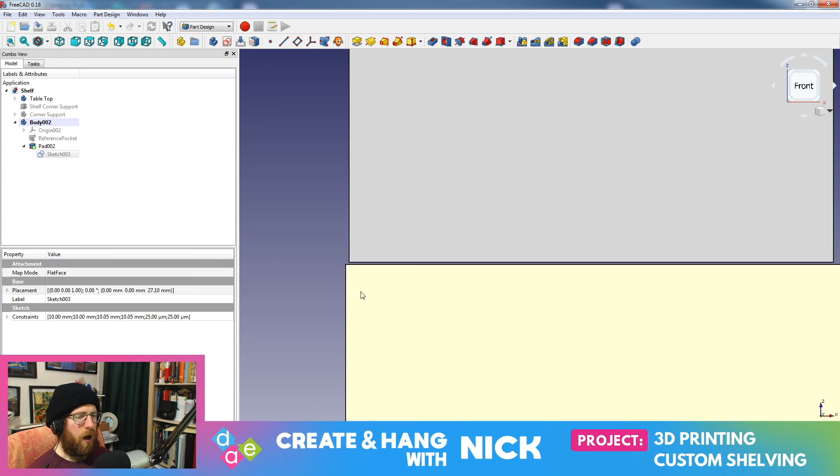2 dimensions. I want this to be 8 millimeters down. Whoa, hold your horses there, bud. And then, ready for this? 222. And if I hide this, that should still match. Could we fit it all, please? Zoom to fit. Oh, barely. Just barely. I wonder what was off. Huh. Weird. Well, that's alright. Because the height's gonna change anyway. I'm not super concerned about this being off by a smidgen, though my curiosity is piqued as to why. I don't know why the accents are coming out right now.

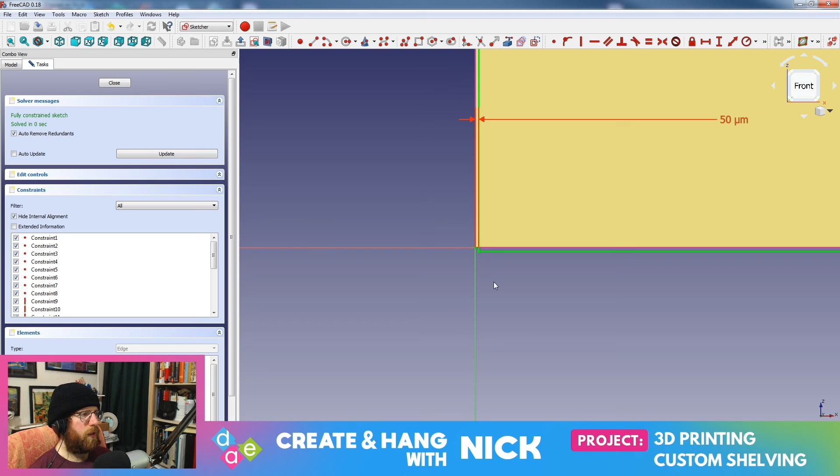Let me see here. Sketch. So that's just that. That's fine. Is it because the corner shelf is a different size than I would think? Corner support. Turn you back on. Oh, hello. What is this? Oh, what happened here? Whoa, whoa, hold on here. Huh. It went the wrong direction. Can I just make this negative? Nope. Doesn't like that. Hold on.

Somehow this got mucked up. I'm going to delete that. 'Cause this needs to be over here. The top seems to be okay. Don't know where that went wrong. So from here to here. That was really weird. And then because... what is this distance here?

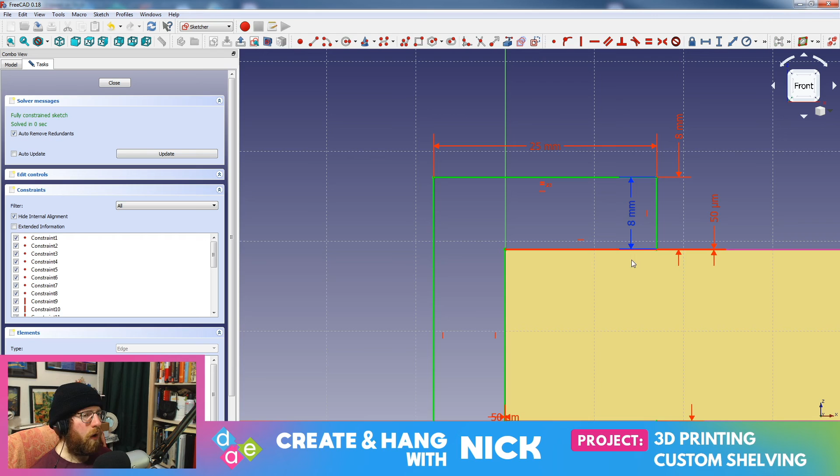That's 8 millimeters, so I need to make it 8.05 millimeters to make it flush. That's what it is, because I'm taking into account, I mean, technically I don't. That's just for the tolerance. That is still going to be straight. So what I could do in the pad is take the top down by 0.05, so 1.05, and make this 8.05. Because then basically if I take the 0.05 from here, put it up there, that gets it back up to the 222. So that should now be flush.

Assuming I can do the right thing. Ha-ha! Love it when a plan comes together.

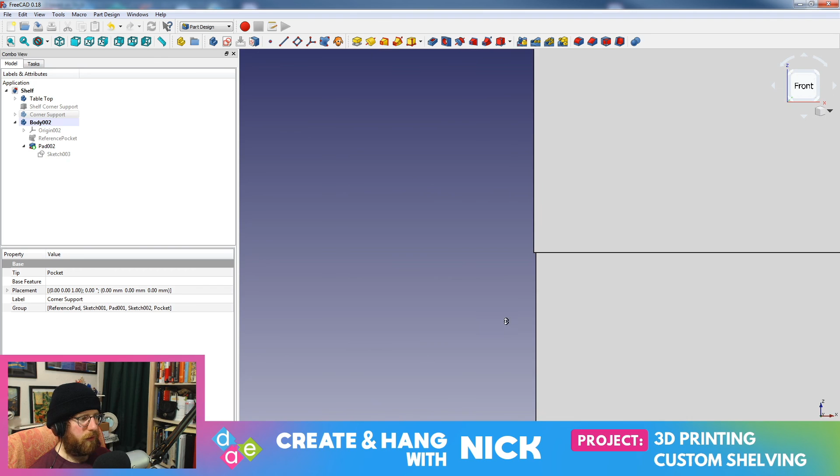It's not... it's meh. Why is it off of the table? Again, it probably has to do with the actual corner support here. Oh, you know what? It's the placement of the top up here. Oh, it's so close. I don't want to go crazy. I've done enough math there. I'm sure I could figure out why that's going on. This is a cardboard shelf. Let's not tear our hair out over it. Okay.

But at least I know I can figure it out because I'm smart. I am smart. Thank you very much.

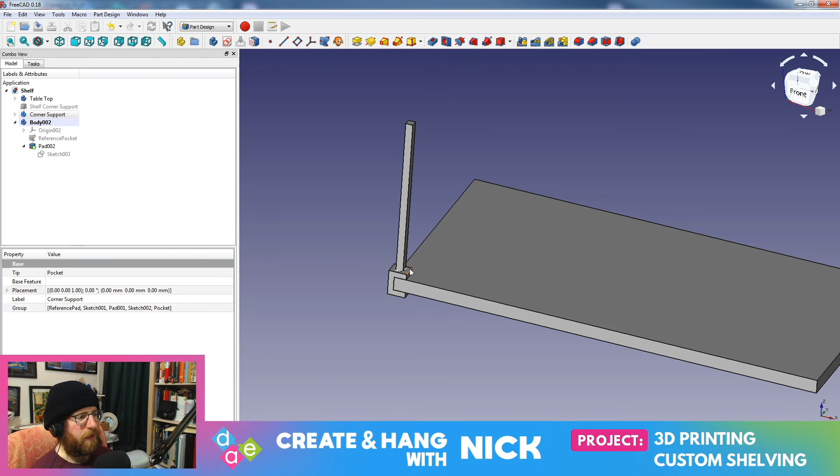And we're going to save that. All right, so we've got 2 components built right now. I think what we're going to do is in the next video, we're going to go ahead and start figuring out the parts that need to sort of fit and snap together to get the support pieces in place. I think we're going to start with maybe figuring out the parts that go across here. And we'll figure that out. I'm thinking, though, because this is... How long is this piece here? Hold on. Let's just do a little bit of prep work for next week.

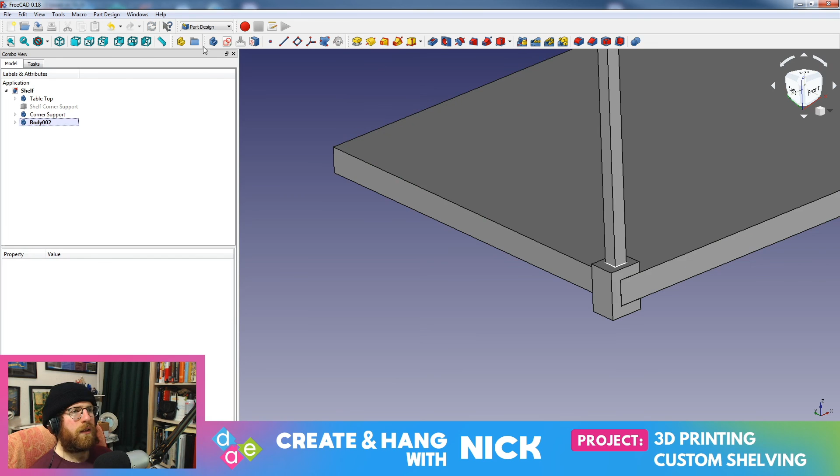Oh, I have a ruler here. Does that measure distance? That's not what I wanted at all. Ruler, you have failed me. I'm saddened. Let's go to part. I think there is a more... yes. Can you do that point to that point? Wait, didn't I write this stuff down? It's in the sketch. What am I doing? Why? No. Clear all. Get out of here. Shoo. Tabletop. Sketch. No, no, no. Close. Thank you. Sketch. 29. Okay, so

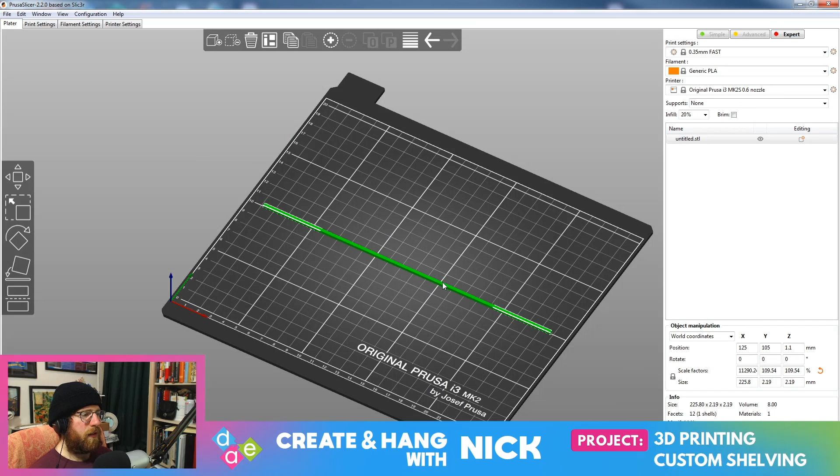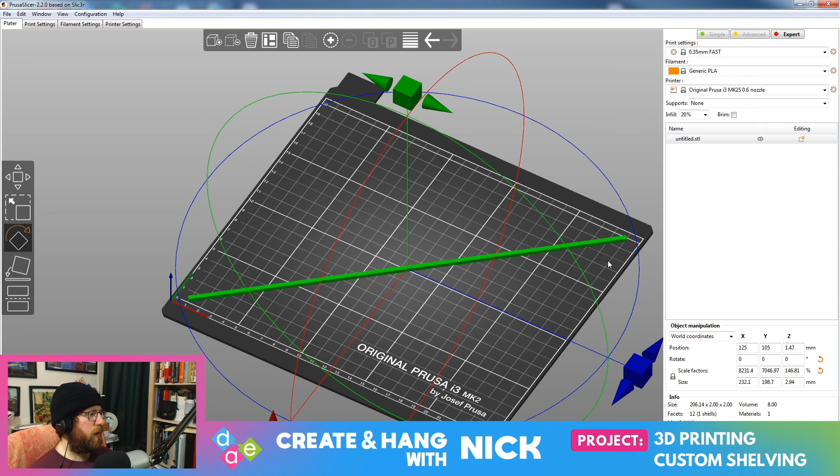293.689. So that's about 11.5 inches across that way. And I think even on a good day, I don't think I can print that all the way. Let's turn this off. Yes, fine. So, will you let me scale it? Hold on. So even if I make this, say, 300. Barely, but I'm going to have some bigger pieces here.

So I think for safety's sake, what we're going to do is we're going to print some parts that will fit on here and then extend out to create the pieces that we need. So basically, there's going to be... Sorry. Let me come back over to the drawings. So I think we're going to go over with this design over here, where we're going to have the parts. Basically, you'll have to put two pieces together on a rod and then have it slide down to connect all the parts together. So I think we're going to do that, but we'll do that in another episode.

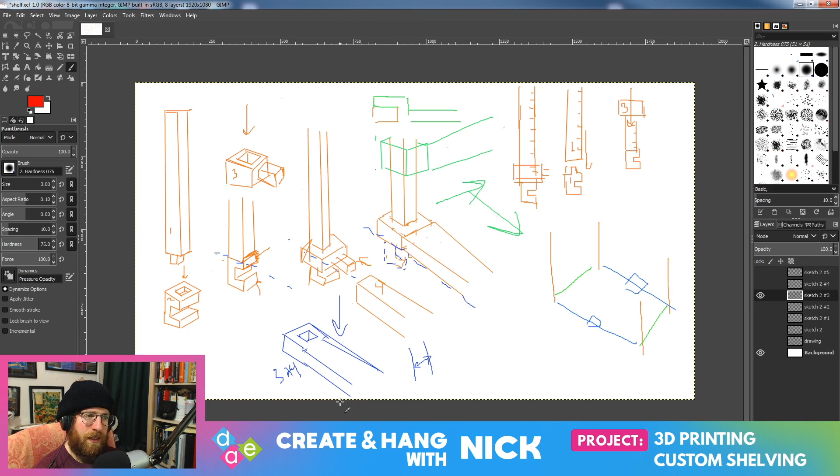So again, my name is Nick. I hope you enjoyed this sort of CAD experience here. Again, sort of just taking this step by step and working on getting the workspace optimized, because that's going to allow me to do more cool things.